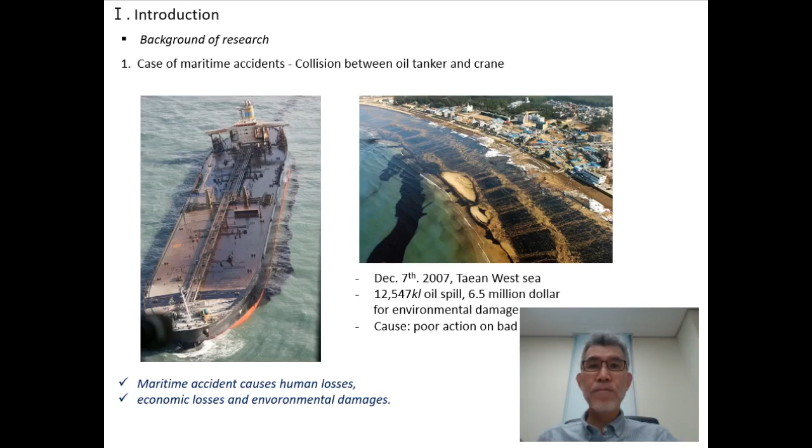Maritime accidents are less frequent than other industrial accidents. However, when an accident occurs, it not only results in the loss of human lives and physical damage, as shown in the previous slide, but also often leads to negative consequences towards weakening national competitiveness.

Again, the maritime accident statistics show that fishing vessel accidents account for around 70% of the total accidents, though the government provides a national level plan to prevent maritime accidents. The numbers have been increasing over the past years.

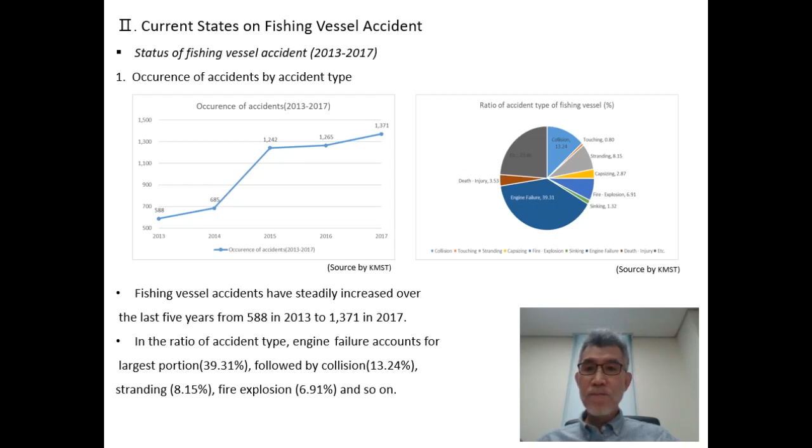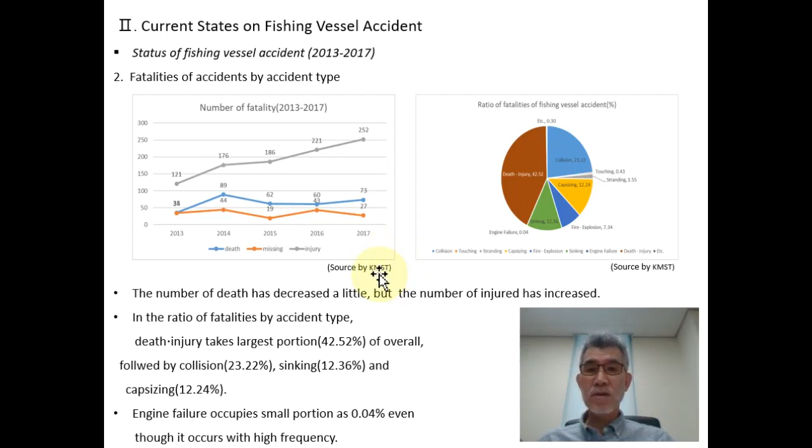For our analysis of fishing vessel accidents, we use the 9 accident types from the Korea Maritime Safety Tribunal, or KMST in short, over the period of the last 5 years from 2014 to 2018.

Most of the research on fishing vessel cases occurred in Korean waters uses only primary accident data from KMST, based on which measures to enhance safety are suggested.

Since the accidents are classified into different categories, previous studies mainly focus on analysis of specific type or types, causes of accident, and corresponding accident mitigation measures.

Also, risk assessment methods were applied to calculate risk level for each accident type and propose diverse measures to reduce potential accidents.

Usually, the statistical method needs a great amount of sample data. On the other hand, the grey relational analysis, or GRA in short, requires less data and analyzes many factors, which can overcome the disadvantages of a statistical method.

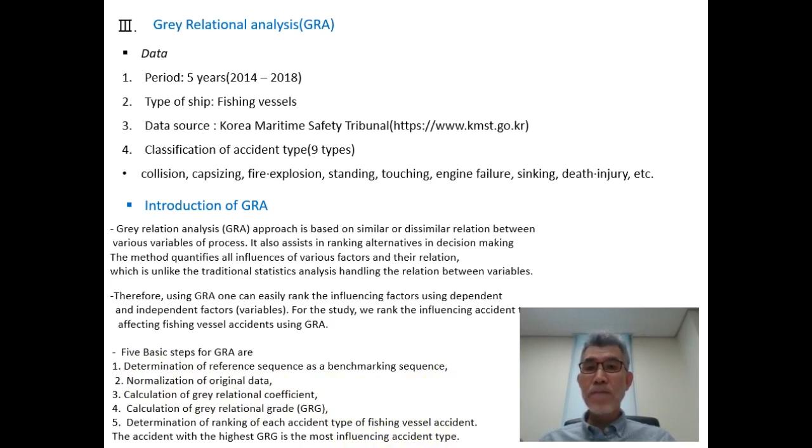Based on the procedure outlined here, we perform GRA for fishing vessel accident and identify main accident types which cause accidents.

First, we calculate the influencing accident type using frequency data.

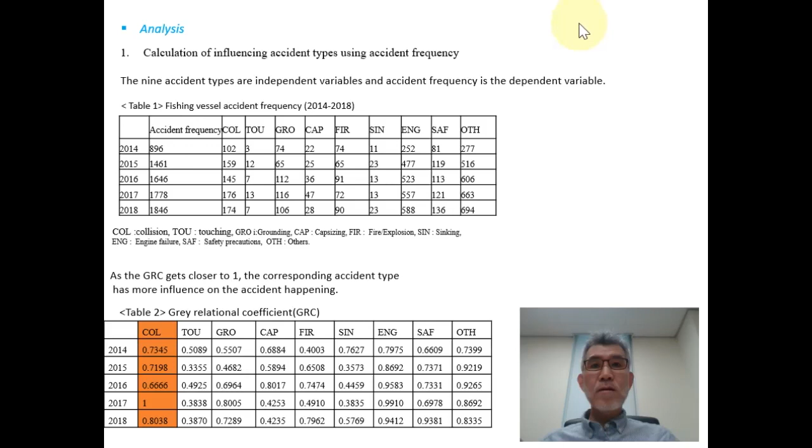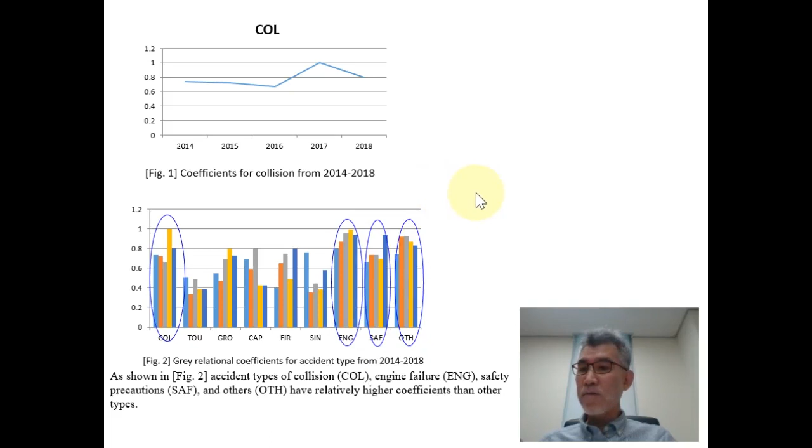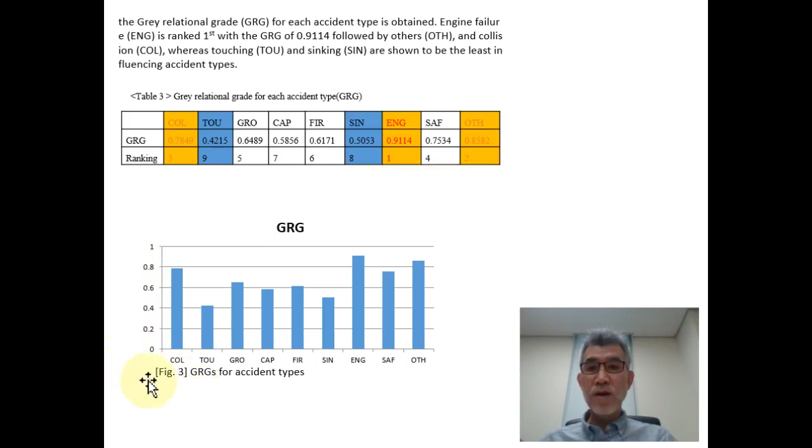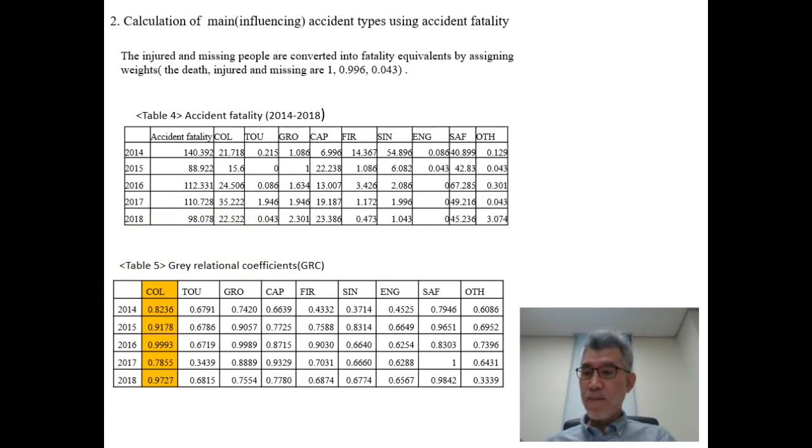For instance, GRCs for collision for 5 years are shown in Figure 4, and GRCs for other accident types are shown in Figure 5.

From the above table and Figure 5, collision, grounding, capsizing, and safety precautions have higher GRCs compared to other types, whereas touching, engine failure, and others have lower coefficients.

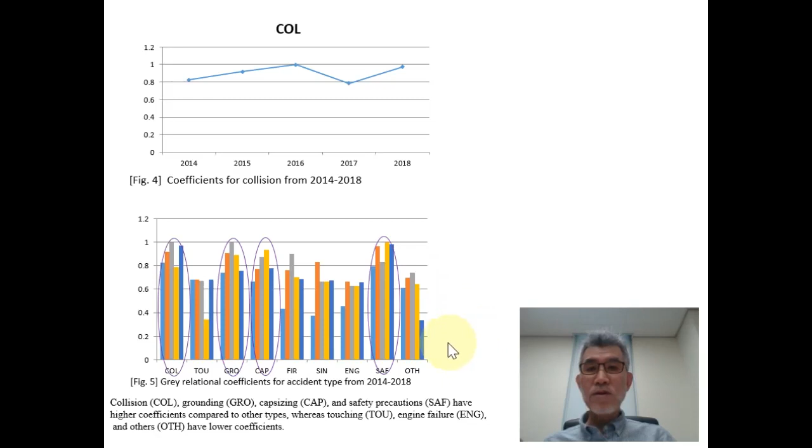The GRG and the ranking for each accident type are presented in Table 6. Safety precautions is the most influencing type with GRG of 0.9148, followed by collision and grounding.

Engine failure and others are the least influencing accident types. The GRGs for 9 accident types are shown in Figure 6 here.

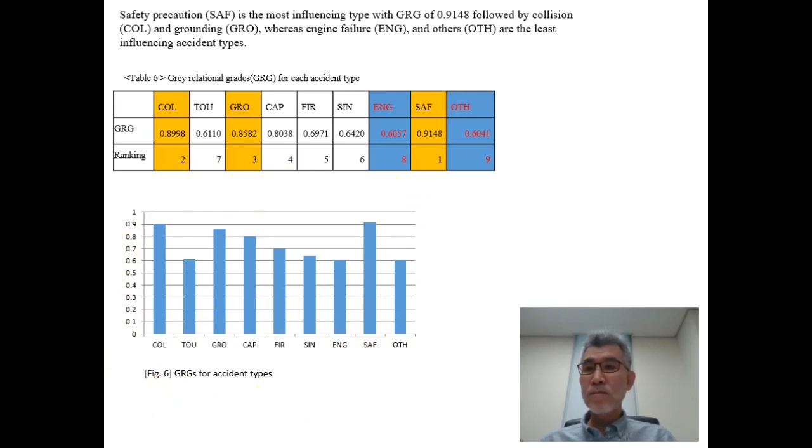Let me go to the next slide.

GRGs for frequency and fatality are compared and presented in Figure 7, where vertical blue bars represent frequency and orange bars represent fatality. Collision and safety precautions have higher GRGs in both frequency and fatality, showing that they are major influencing types in fishing vessel accidents.

Based on the difference in GRGs for accident frequency and fatality calculated from GRA, the following Table 7 shows GRG ranges within which the accident types are grouped, where GRG for safety precautions and collision are over 0.7. Touching is a less influencing type in both frequency and fatality.

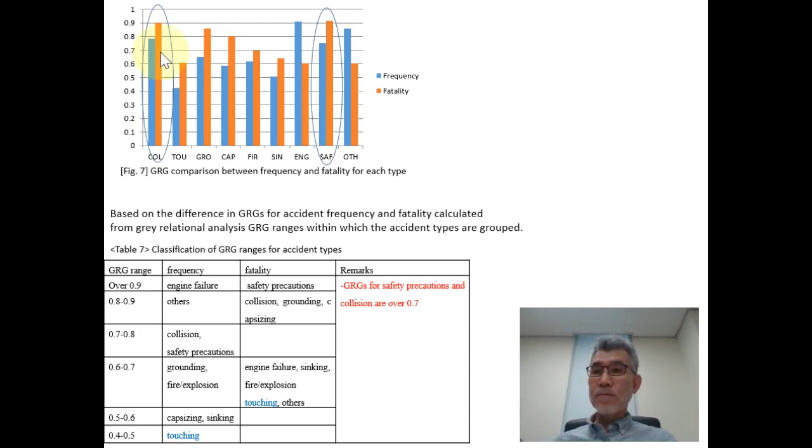The average of the two GRGs for each type are calculated and presented in Table 9, where collision is the most influencing type with average GRG of 0.8423, followed by safety precautions, while sinking and touching are the least influencing types of accident.

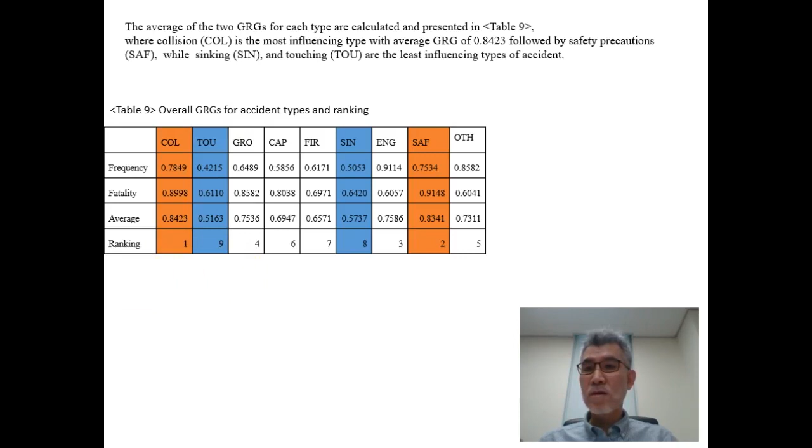Now we wrap up our presentation by summarizing the result and mentioning a bit about the future research direction. For the establishment of a maritime accident mitigation policy, one needs to classify the major types for accident.

In this study, using grey relational analysis, we identify the most influencing accident types for fishing vessels over the period of 2014 to 2018. For the frequency case, engine failure, others, collision, and safety precautions were the most influencing types, whereas touching and sinking were shown to be the least influencing accident types.

For the fatality case, safety precautions and collision were the most influencing accident types, whereas touching, engine failure, and others are the least influencing accident types.

Finally, for the combined case, that is the average of frequency and fatality, collision and safety precautions were the most influencing types, whereas fire, sinking, and touching are the least influencing types of accident. Therefore, the results show that collision and safety precautions should be paid more attention, among others, in reducing maritime accidents.